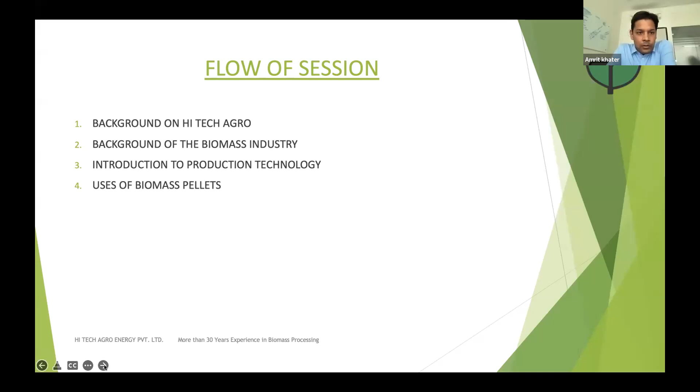Hi Tech Agro happens to be one of the pioneers in the biomass field in India. The first steps were taken in the early 1980s, 1982, by my father, and I happen to be the second generation, as Dr. Dhamija mentioned. The first few machineries were imported from Switzerland. It was a dying technology all across Europe and North America, becoming obsolete, and we got the machineries to India.

We further developed the pre-processing equipment like dryers and hammer mills to suit local conditions, based on the raw materials, because primarily across the world, when you talk about biomass pellets, 99% of it refers only to wood-based material. When we look at India, a country producing a lot of different agri residues, the primary machineries which were used failed to perform because they were not really meant for different biomass residues, and were only meant for sawdust.

That is how we started, and by about 1985 we had streamlined the production of briquettes. We had developed our in-house dryer systems and hammer mill systems, and the briquetting machines were further upgraded to suit the Indian biomass residues available locally.

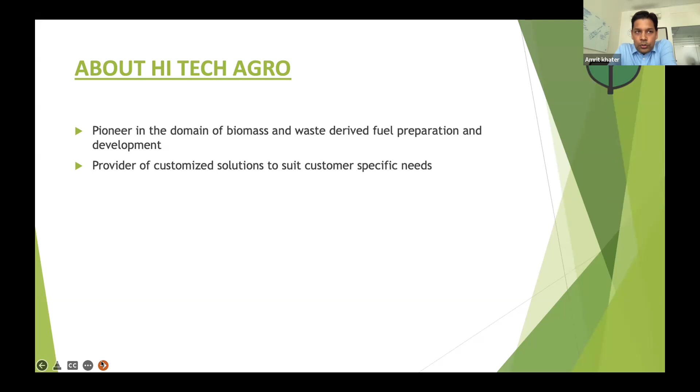From 1997 onwards, we started supplying these machineries across different parts of India, starting with Punjab, Rajasthan, Gujarat, then South India. All these were customized because there were specific client needs, and there were no standardized norms of the industry at that time.

Some people wanted smaller-scale machineries, while others had larger residue generation themselves and were looking at larger capacity plants with more integrated solutions. That is how we started the journey of providing integrated turnkey solutions.

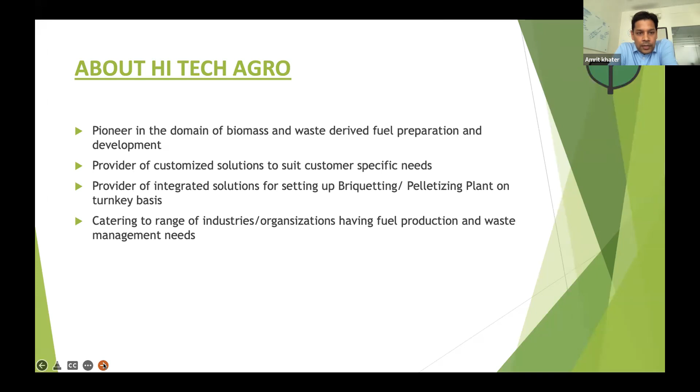Not only individual entrepreneurs, but of late we have also had FPOs, the farmer producer organizations themselves, who have come up wanting to utilize their own residues, be it cotton stalks, pine needles in Uttarakhand, or bamboo plantations in the Northeast. We have been providing solutions to all these sectors.

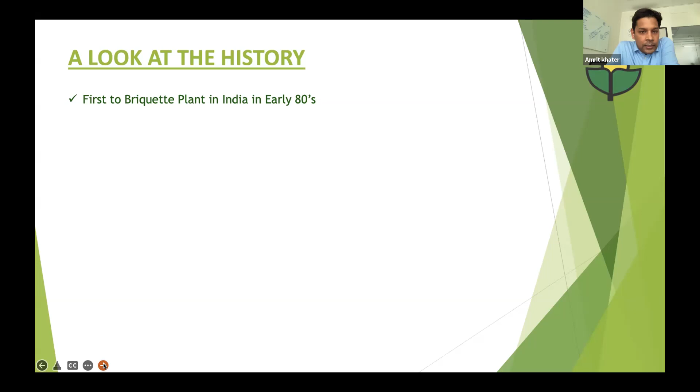Just a short look at the history: in the early 1980s, the first plants were set up. We developed the flash dryers to suit the first materials used, sawdust. Then we also developed portable briquetting plants because there was interest from a couple of agricultural universities in South India, who felt that instead of bringing the biomass from the fields, we should take the plant itself to the farms, so we could make the briquettes or pellets there and just transport the end fuel to the consumer.

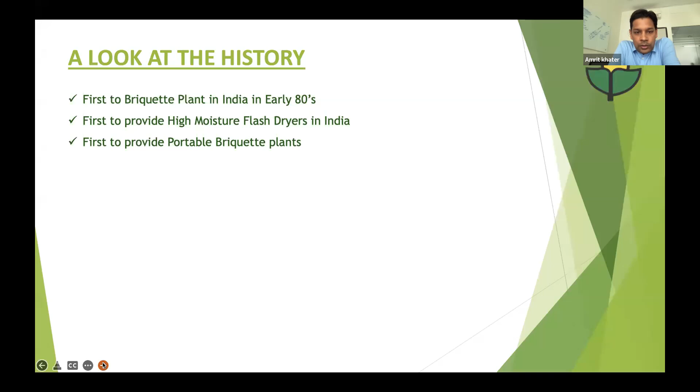That was one of the very important developments that we had. Of late, with the air pollution importance as Dr. Dhamija was mentioning, with the changing norms, there was a need which arose for having air pollution control equipment, which have now become an integral part of the systems and solutions. But till a couple of years back, this was not something which was actually very relevant or present in the briquetting and biomass industry in general. So this was something that we introduced.

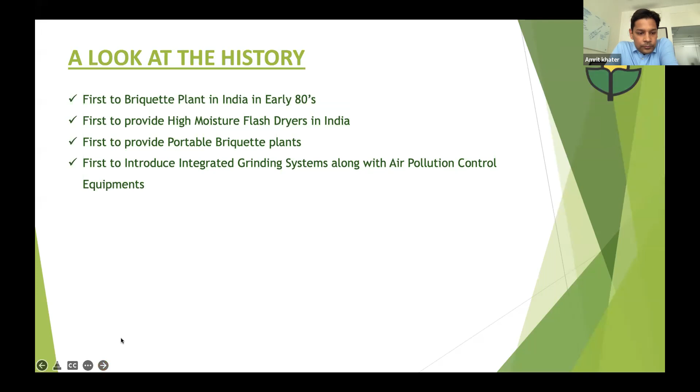Again, for pelletizing, apart from the normal pelletizing for fuel, pelletizing of a lot of materials is done for different food products also. So we introduced the temperature controlled pelletizing for food grade items.

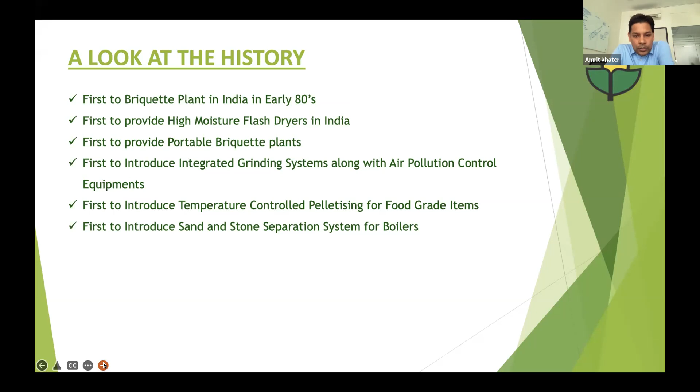The biomass usage increased over the years, and people started using biomass directly in their boilers. A very strong need came up for systems to remove the impurities from biomass, because biomass as it comes from the fields will have impurities like sand and stones, and the boilers which are to run continuously around the clock were facing high downtimes. This was something that we introduced to suit their requirements. Then RDF pelletizing was again something that we did.

Paddy straw stubble burning was a major concern in Punjab, and the first couple of projects for paddy straw pelleting and briquetting in Punjab were done by us.

100% pine needle pelletizing. Pine needle again happens to be a major cause of forest fires in the hills, and this project was done with an FPO, the first of its kind all across the world, wherein we are actually pelletizing on the hills itself, 100% pine needles without any use of binders, and the fuel is actually sent downhill for consumption.

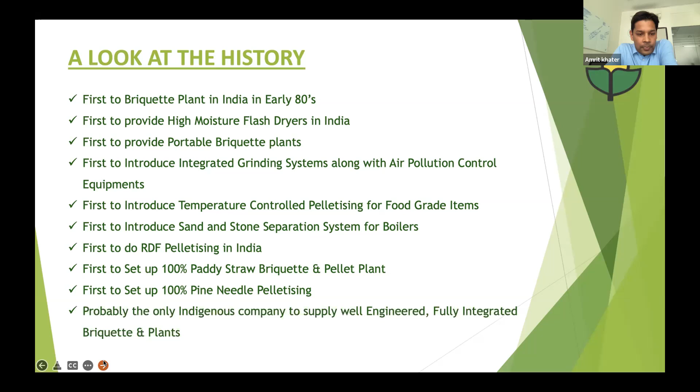So we've been into the business for more than 35 years now, supplied more than 500 plants worldwide, more than 100 dryers working, and perhaps one of the largest suppliers of integrated solutions all across the biomass domain.

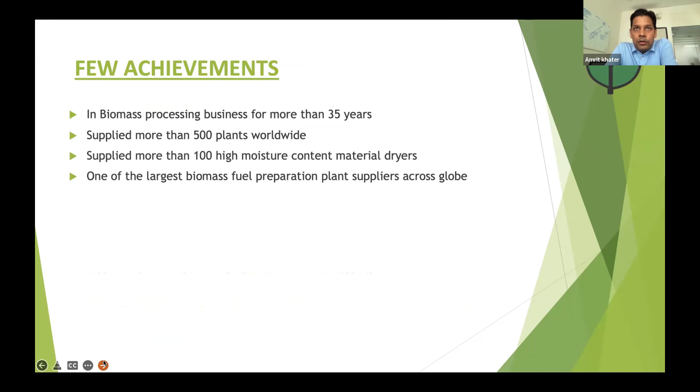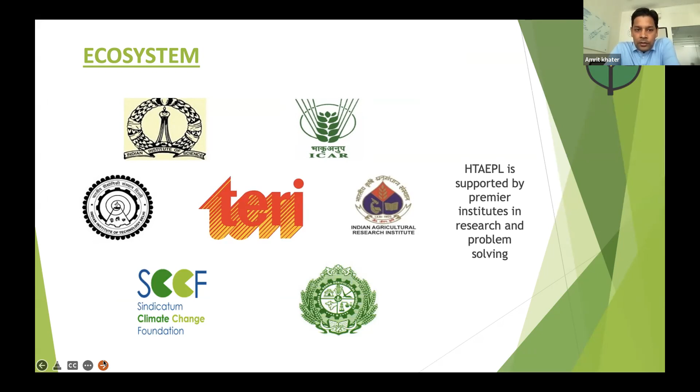Why we've been able to do all this is because we have a strong ecosystem, and we are supported by premier research institutes. We've done projects and jointly developed systems with IISc Bangalore, ICAR Bhopal, Indian Agricultural Research Institute, TERI, and Acharya N.G. Ranga University in Andhra. We have been continuously working with them on a regular basis for development, for identifying problems that we jointly foresee could come up in the future, and then arriving at suitable solutions.

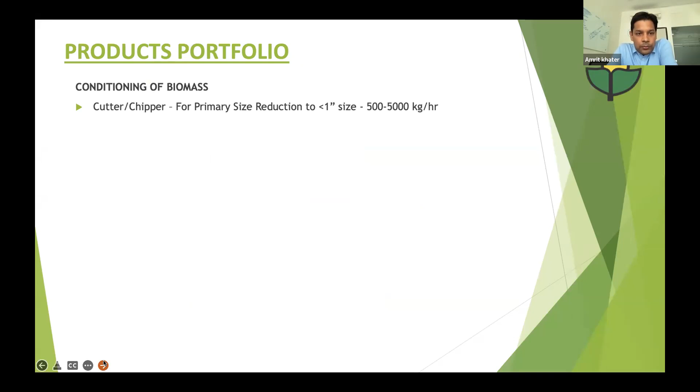In terms of products, what we do is the conditioning of biomass. For any biomass to be processed into pellets, some amount of conditioning or pre-processing is required. Chipping or size reduction, primary size reduction, could be one of them. The second is fine sizing, because to convert into pellets, the material needs to be in a small size, which is powdery or granular.

Then there are dryers for moisture reduction, because not all farm residues come in forms which can be directly utilized. Most materials have moisture levels which are way beyond what the pelleting, hammer mills, or size reduction equipment can handle. So dryers are used for those.

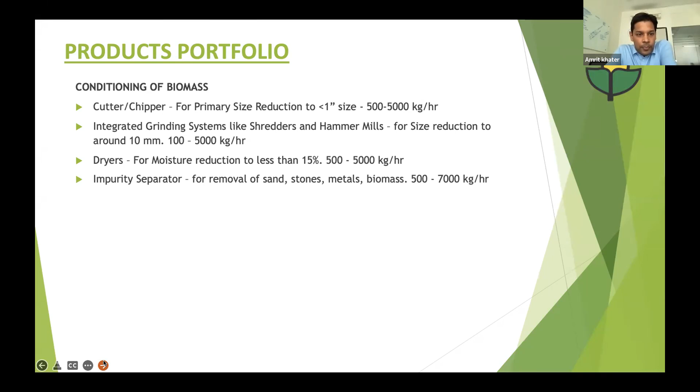Impurity separator for the removal of sand, stone, and metals from the biomass is a very important equipment. Then the densification, there are briquetting machines, pelleting machines, material handling, and all related equipment like pneumatic handling systems, belt and screw conveyors, bucket elevators. All these things are the entire range of products that we deal with, and what is required for setting up a pellet production line.

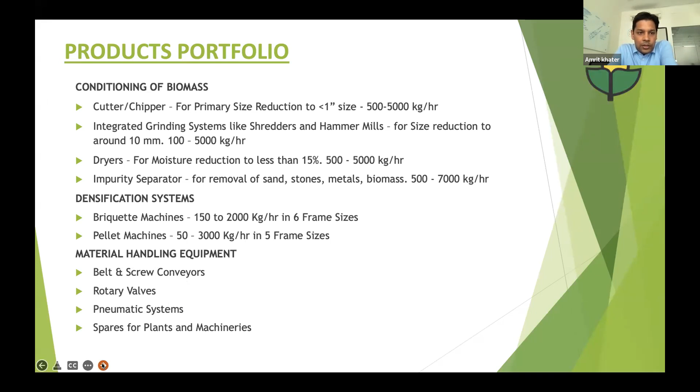Moving on to the next decade, the briquetting industry pretty much started gaining momentum. A few larger capacity machines were introduced, along with hammer mills and dryers. For pellets, the industry had just started, beginning primarily with municipal waste and very few biomass projects. Capacities were still generally small, not more than 20-30 tons per day. Liquid fuel replacement had started, and briquettes started moving pretty well.

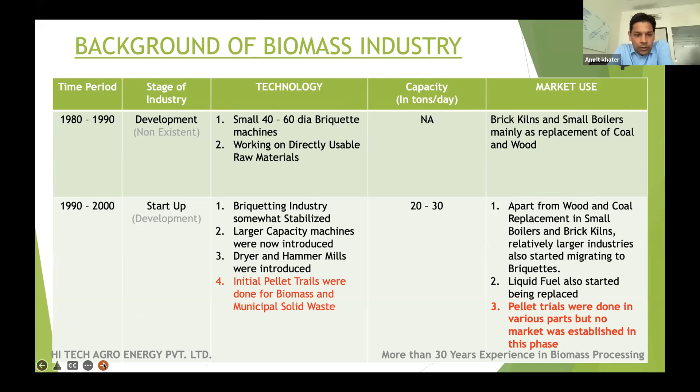Pellet trials were done, but there was no concrete market linkage that could be established in this phase. As a result, the industry did not really pick up very well during that time.

From the year 2000 to about 2016, the briquetting industry pretty much standardized. Many projects came up all across the country, some being automated integrated plants working at about 30 to 100 tons per day capacity, but most of them small manual setups. The range of agricultural waste utilized also increased.

Apart from directly usable materials like sawdust and groundnut shell, people started also going into other materials like cotton stalks and soybean husk, which were not as easy to process, but with development of pre-processing technologies, these started taking place. Pellets also gained momentum, and a number of sawdust plants based on foreign technologies were set up.

The primary market that sawdust pellets addressed was appliances like pellet burners and pellet stoves in small industry, which were directly replacing liquid fossil fuel and provided significant cost saving. As a result, this really gained momentum.

Also, the pharma and FMCG companies, mostly all MNCs, started exploring the use of biomass, and gradually shifted by the end of this phase to biomass as and where they found assured market linkages for the briquette and pellet supply.

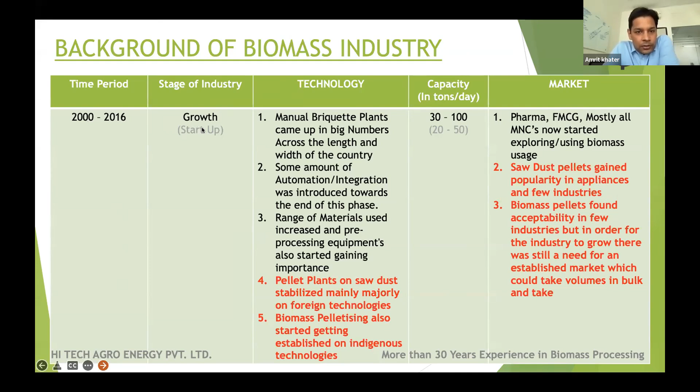So post this, currently the stage in which we are in, briquetting is fairly streamlined. Integrated automated setups are coming up all across the country. Pre-processing in terms of cleaning, sizing, and drying across all materials has been pretty much streamlined, and has become a routine affair now.

The pharma and FMCG, mostly all MNCs, still continue to use biomass briquettes and pellets. In fact, whatever few companies which are not there till now on biomass are also trying to get themselves on board, as long as they can find the fuel linkages.

Biomass pellet plants based on indigenous technologies which were developed now started getting established in this phase, and a good number of plants came up. With government policies and increasing awareness, organizations like NTPC and state-owned power plants, Reliance, Godrej, and many corporates coming into the biomass sector have created huge traction, and many more plants are now coming up in the biomass sector as well, and sawdust appliances obviously continue.

So probably a couple of years down the line, what we are looking at is a very established and standardized market with long-term offtake contracts, and also contracts for back-end integration in order to source the raw material and work sustainably in the sector.

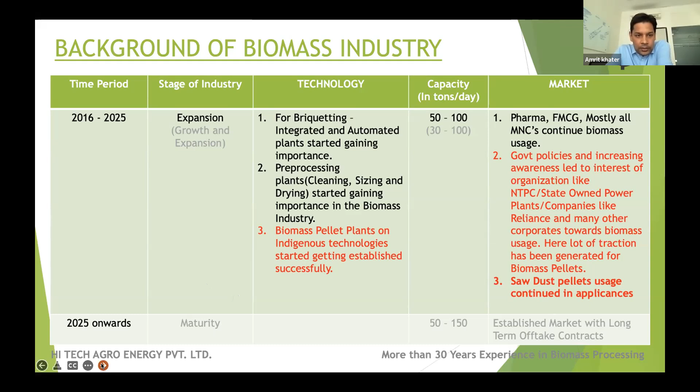So what all can be used for pellet production? Almost any biomass, any agri residue that you can think of, can be used.

Starting right from sawdust and sanding dust to wood chips and shavings, these being the woody biomasses. Moving on to pine needles, juliflora, wild grasses, lantana, shrubs, bamboo chips, bagasse, sugarcane trash, press mud, coir dust.

All husks primarily, rice husk, coffee, sunflower, mustard, any husk of any agricultural commodity. Shells like groundnut, castor, almond, all stalks and straws like paddy straw, cotton stalks, mustard stalks, maize cobs.

So these are all the materials that can be and are being used for the process of pellet production.

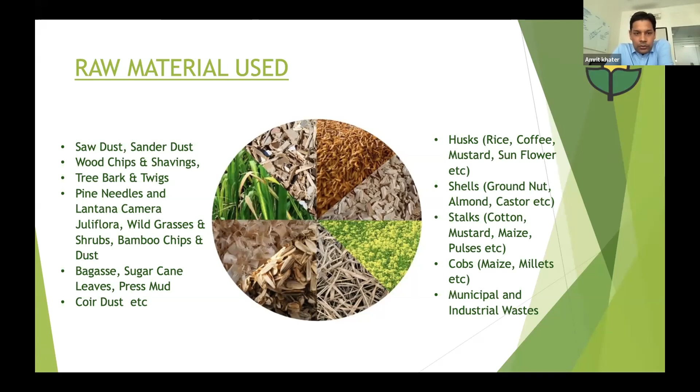So when we talk about biomass pelletizing, the biomass, basically crop residues, leaving aside wood waste, we are looking at primarily three types of waste. The first is waste which comes from agri industries like groundnut shell, rice husk, bagasse. These materials have had fairly well standardized usage, going on for quite a number of years now.

The second is material which comes from the farms but still passes through some process like threshers, like soya, mustard, tur dal. So the waste coming from these materials is something which is also being processed in the country as of now.

The third, and the most in terms of quantum, is the most widely unutilized waste and the major cause of farm fires and pollution arising due to it - materials like cotton stalk, cane trash, paddy straw, which are basically left in the field, which did not have a great market till now and were not being utilized.

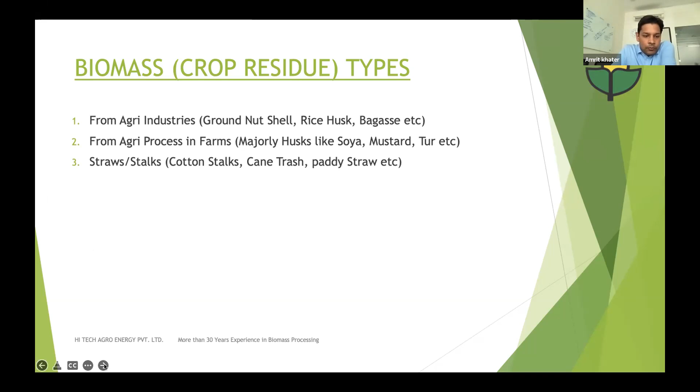Any production plant to be set up requires biomass collection as the step before. So just a brief on biomass collection: the first two categories are waste which are available in readily handleable form, which can be just loaded onto a trolley or truck and got to the plant for processing. Straws and stalks will be forming the major chunk of material going into pelletizing in the years to come, so the collection system for that needs to be established.

These are mostly collected through baling, and a few materials like cotton stalks are done through online chipping in the farms. In case of baling, we get square bales, small square bales weighing about 15-20 kgs. For larger farms and completely mechanized systems, there are round bales weighing about 600-700-800 kgs, which can be collected.

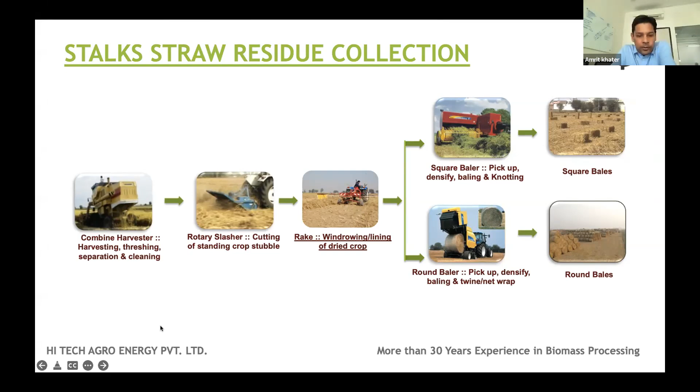Coming to the processing technology for production: once we have the material, it could be bales or chipped stalks, chipped cotton stalks, or any other chipped biomass. We look at primary sizing, which basically converts the material into a form wherein it can be handled in a mechanized way, with no need for any manual intervention subsequent to that.

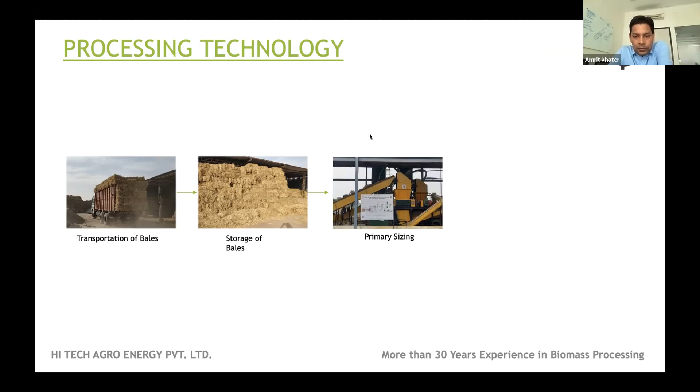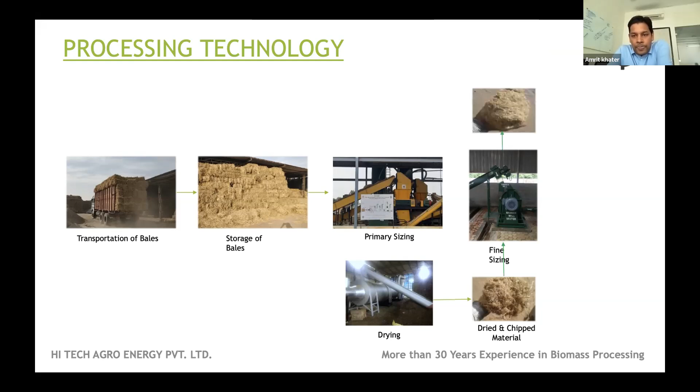From here, if the moisture levels are high, it goes through a drying process. Then further to fine sizing, to convert it from say a 1 to 2 inch size to almost less than 5 millimeter, 5-6 millimeter size, to ensure it is in a pelletable form. This then moves further to the pelleting, and the pellets are made.

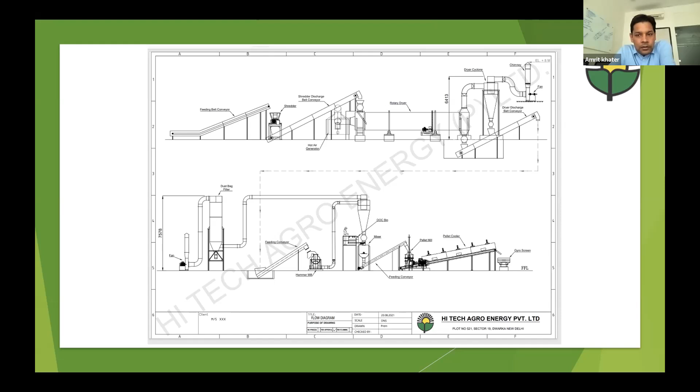A short video on the production process is now being played.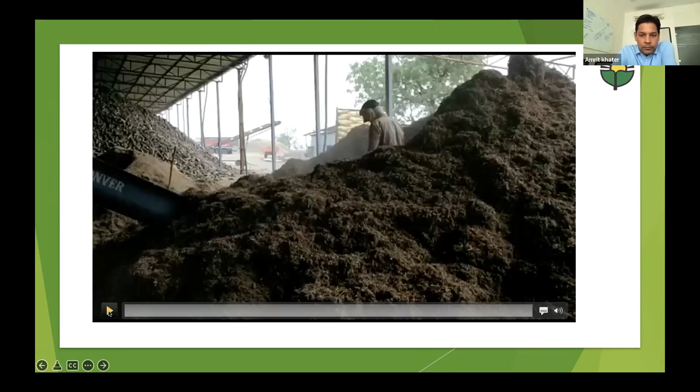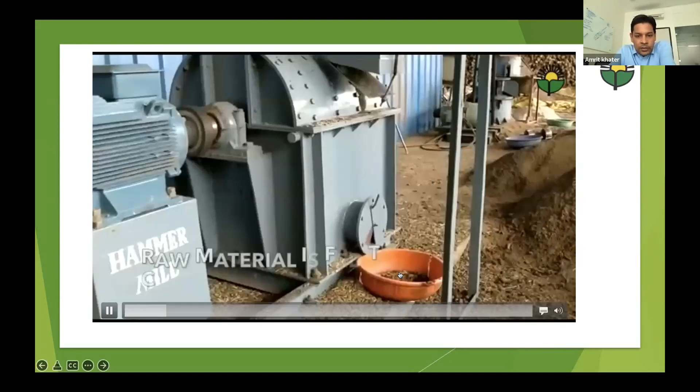The separation of stones, sand, and any other metallic impurities, if they are part of the biomass, happens at the first stage.

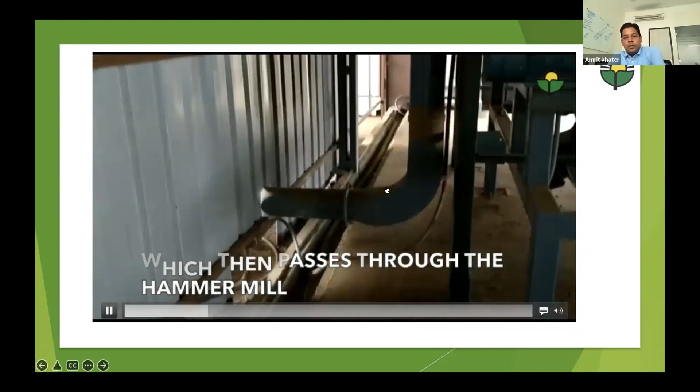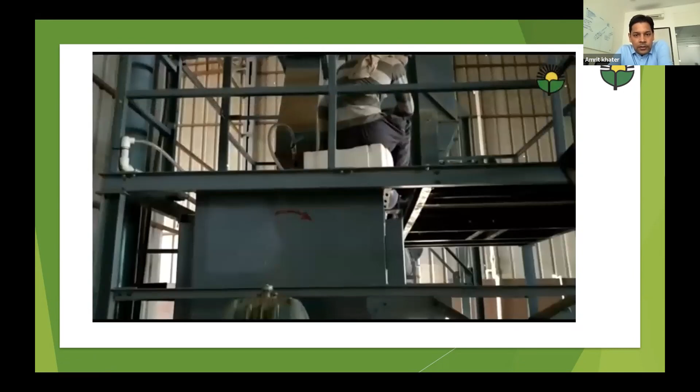The crushed material then goes into the mixer, where if required, the addition of water happens and moisture uniformity is created, and it acts as a buffer. The dust-laden air goes into the bag filter.

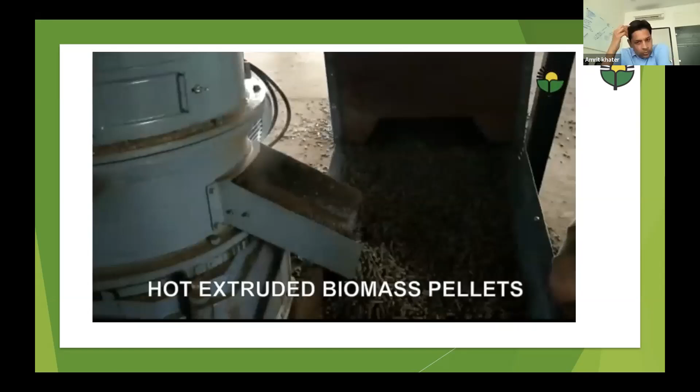The conditioned material from the mixer is fed to the pellet press. The pellets formed are quite hot, at about 80-85 degrees centigrade, and are cooled and dried and then sent for further storage.

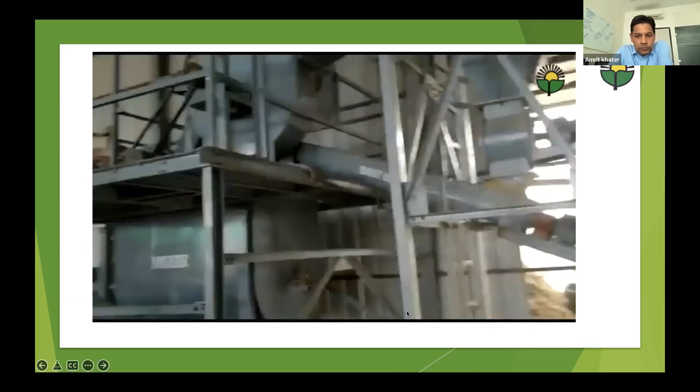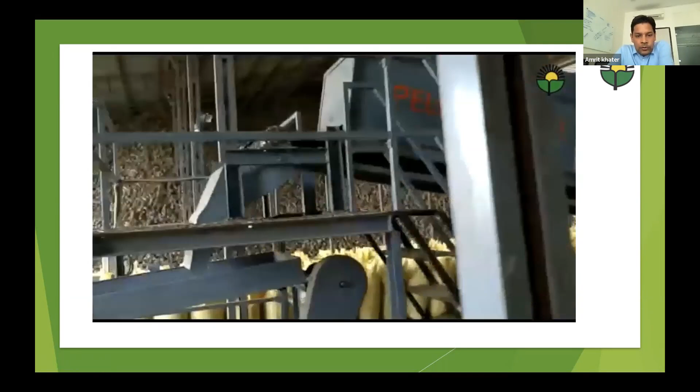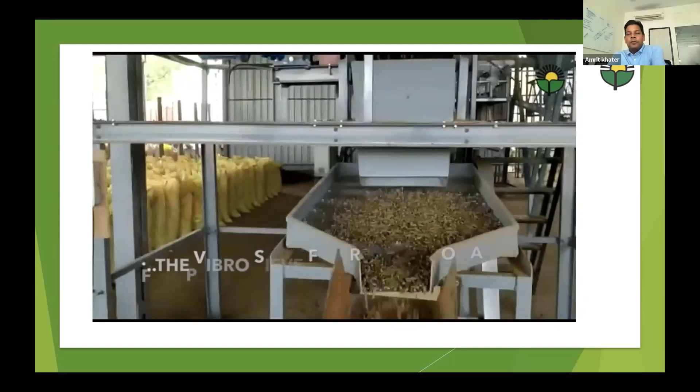In case of material going to smaller industries or appliances, the pellets could be packed in bags. In case of bulk consumers, like power plants, it needs to be sent in loose open condition, just open pellets loaded onto the truck.

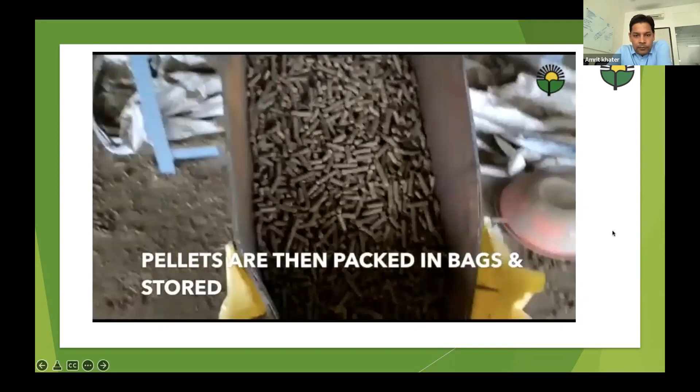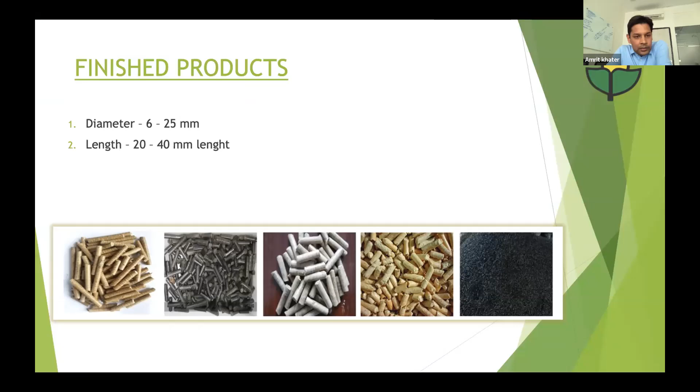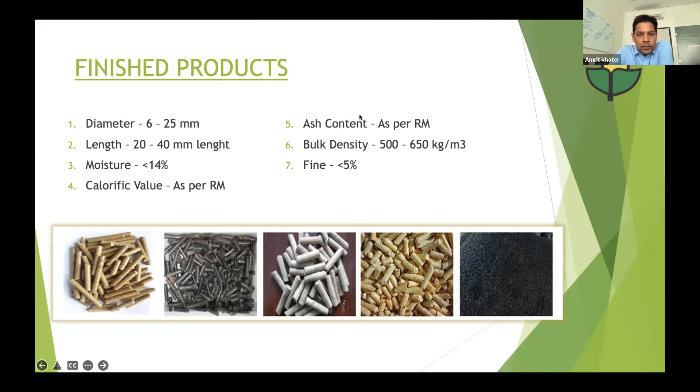So the finished product pellets, just a few pictures of different pellets from different materials. The diameter typically ranges between 6 to 25 millimeter, length 20 to 40 mm, moisture levels less than 14%, calorific values as per the raw material mostly in the range of about 3,500 to 4,000 kilocalories. Ash content, again as per the raw materials, mostly what is preferred is less than 10%. Density ranges from 500 to 650 kg per meter cube, and fine generation of less than 5%. This is what a typical pellet spec would be, made from agri residue.

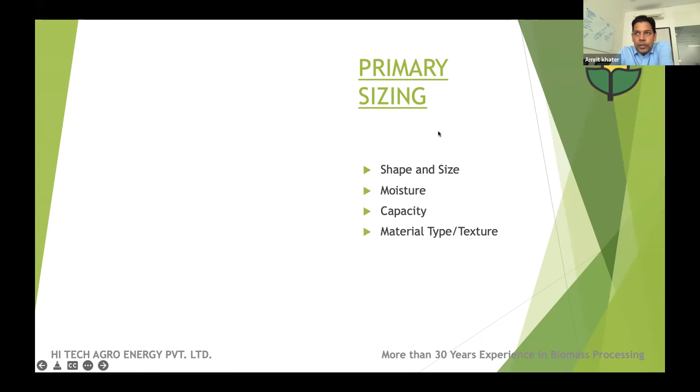So there are multiple ways the processing could be done for production. The first stage, primary sizing: selection of what kind of equipment would depend on the shape and size of the material, the moisture levels, the capacities desired, and the material texture in terms of woody or fibrous, or whatever texture the material has.

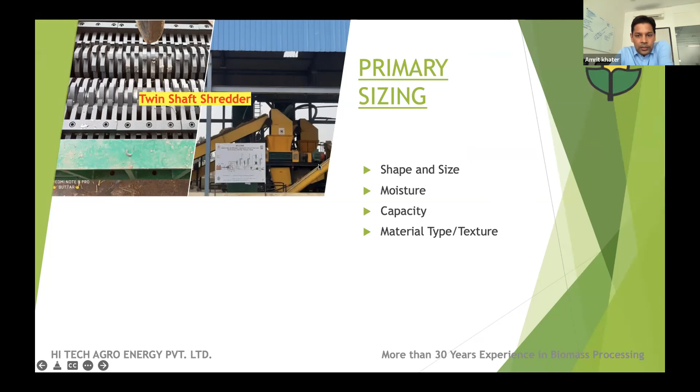Multiple solutions exist. Twin shaft shredders are one of the solutions available for primary sizing, more suited for larger capacity plants and materials with any kind of moisture level. Hammer mill type systems are suited more for smaller capacity and dry materials. Drum chippers are more relevant for woody biomasses with or without moisture levels.

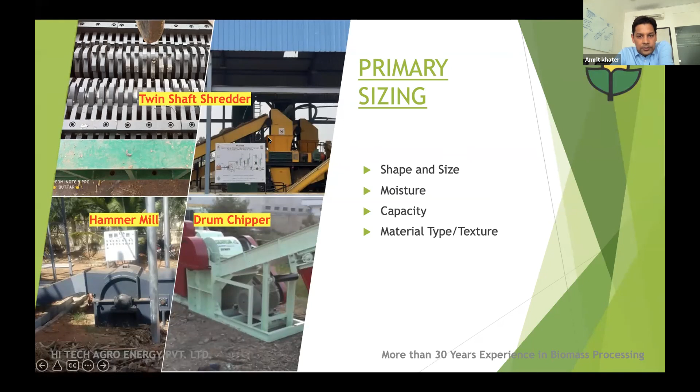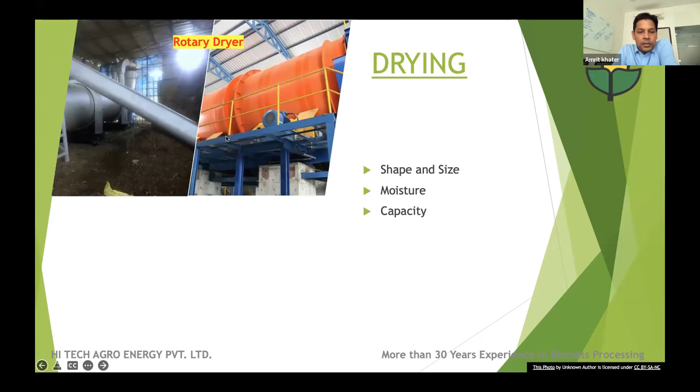For drying, again, the shape, size, moisture, and capacities is what is important. For larger capacity plants, 50 tons, 100 tons per day, normally rotary dryers are used. For low moisture materials and relatively lower capacities, flash dryers are used.

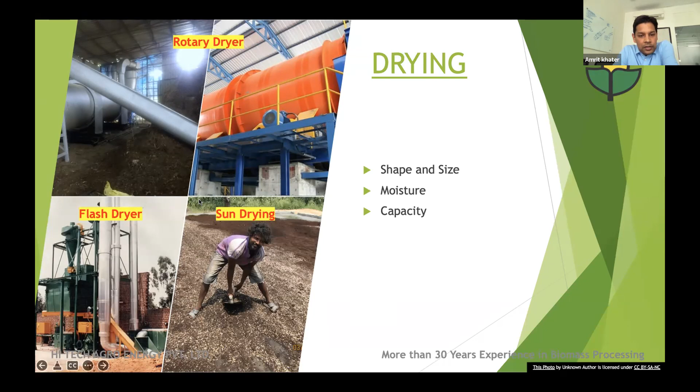Sun drying still happens to be the cheapest form of drying for places like Gujarat, Rajasthan, Haryana, where there is ample sunlight available. So sun drying remains one of the most economical ways for smaller capacity plants.

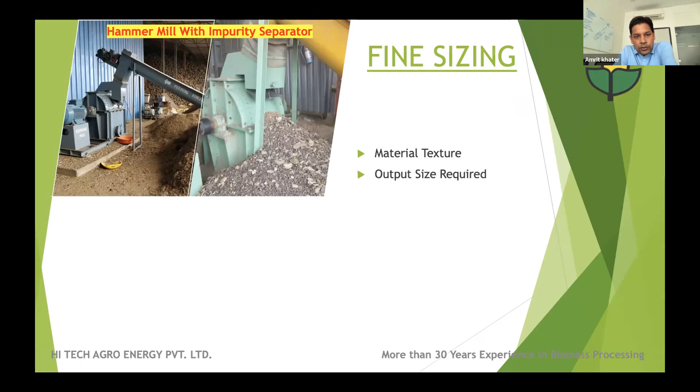For fine sizing, we have different kinds of hammer mills - low speed, high speed, directly coupled, belt driven. Based on what kind of material type we're looking at, whether it's brittle or fibrous, and what capacities we're looking at, the different kind of fine sizing equipment are selected.

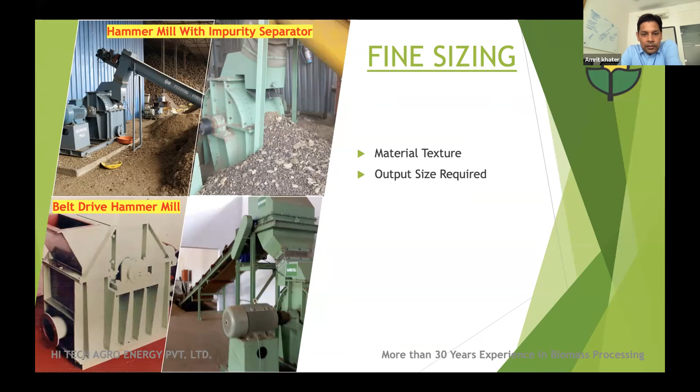Pelletizing wise, it depends on capacity, end market, and material. So apart from the material properties, the end market also plays a very important role in deciding what kind of pellet press should be installed.

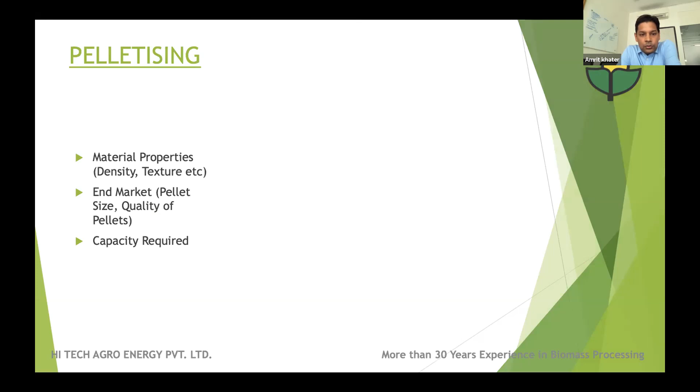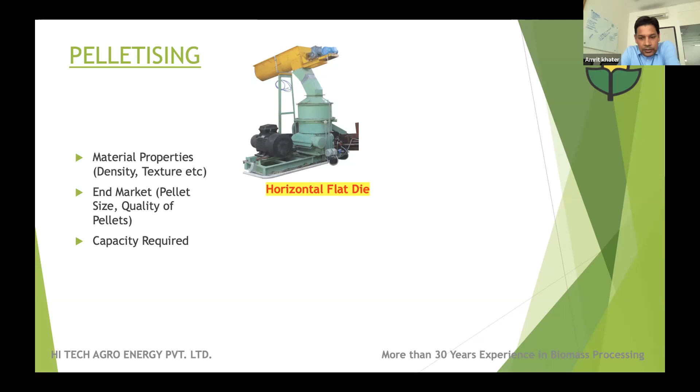If you're looking at something like appliances and probably wanting to produce 6mm pellets from the most woody kind of biomass, then we are probably looking at a more specific ring die kind of machine. If you're looking at any mix of agri residues and large capacity production, then we are looking at horizontal flat die machines. And then there are mechanical briquette presses which are modified to suit pellet making.

For small or medium capacity plants, or for industries already having a setup of briquetting, the mechanical press option happens to be a good option for them to start with and explore the pellet market.

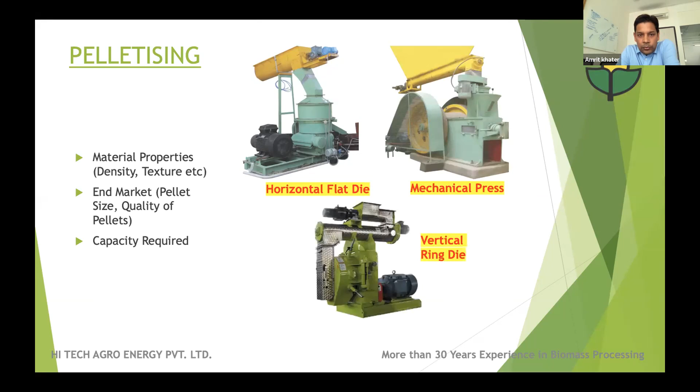Few other items which play an important role in production are the air pollution control equipments. These have become the most critical part now, because the plant setup, when you have multiple pre-processing stages, there is a lot of fine dust and fine biomass particles released into the atmosphere. Looking at current industrial norms, it is not permissible to release those materials into the air directly.

Air pollution control equipment have gained great importance now. Material handling equipment too, because plant capacities have increased, and now instead of just getting readily processable material, mostly the plants get material which has to be pre-processed and conditioned by them to make it suitable to reach the stage of pellet making.

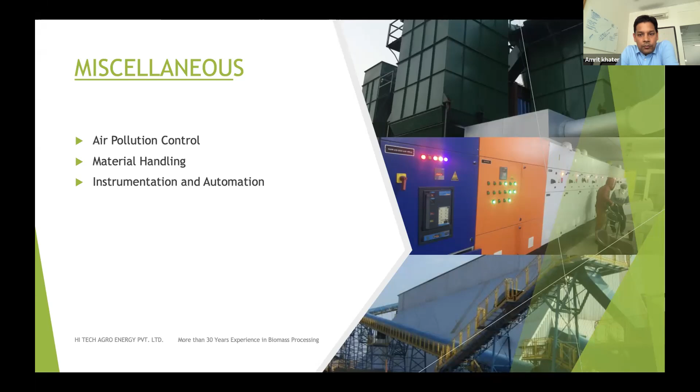With larger capacity plants, manual intervention or any sort of intervention between the different processes turns out unviable and affects the quality, consistency, and efficiencies of the plant. So integrated material handling equipment have become quite relevant now. As capacities have increased, more automated and integrated plants have started coming up, so electrical automation and integration is one of the very important factors to be looked at.

With respect to factors - supposing someone decides to go into biomass pellet production, a few factors that need to be considered before selecting what kind of production technology is the suitability with respect to biomass. Supposing if you're planning a plant on paddy straw as the primary fuel, your technology would be different compared to probably what if you're looking at solid bamboo waste.

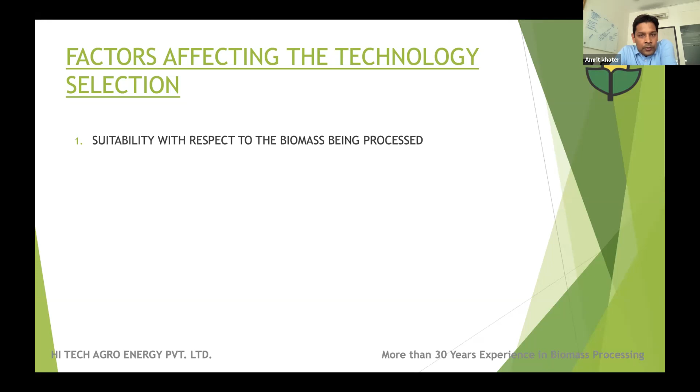The next would be the cost of capital as well as the operating cost. Many times what happens is if the capital cost is lower but the operating cost is so high that it makes the project unviable. So these two things put together is something that should be really considered.

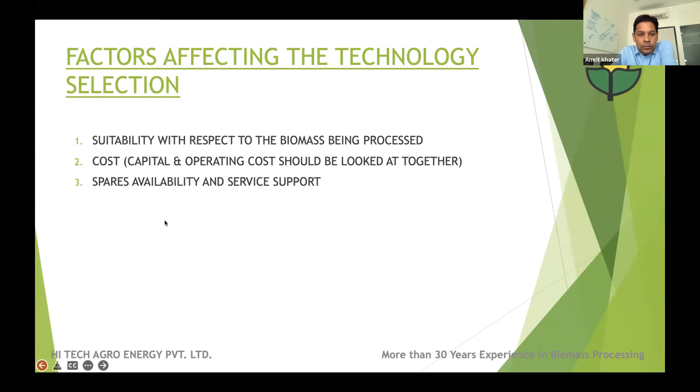And the availability of spares and service support. The biomass industry all across the globe has primarily been working on standardized materials like wood waste. These are materials which come in a specific shape, size, form, and condition, and you can have very large capacity plants with very minimal involvement of manpower.

But in the Indian context, we are basically an agricultural country, and many agri residues are all different shape, form, sizes, and textures, properties. So the local service support plays a very important role here to make the projects a success.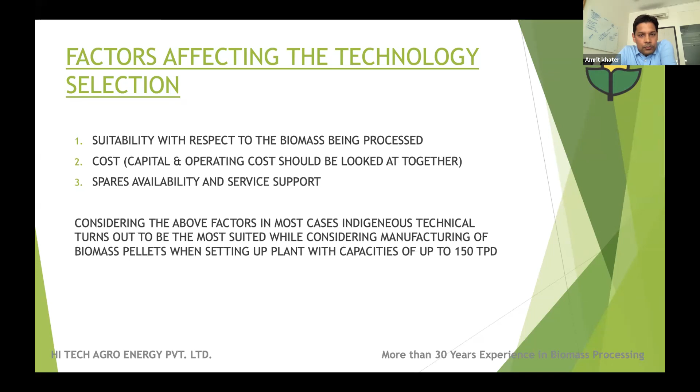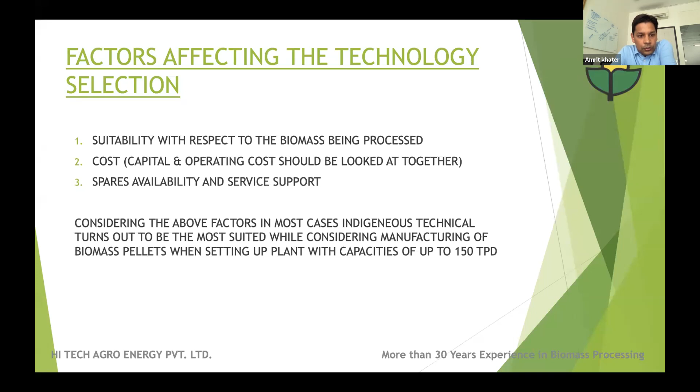Considering all the above factors, mostly what is seen is that the indigenously developed technologies turn out to be the most favorable, because they are more suited to the biomass materials available here. The cost of capital as well as the OPEX cost turns out to be mostly lower than the other European machineries, and also the service and spare support is obviously more available.

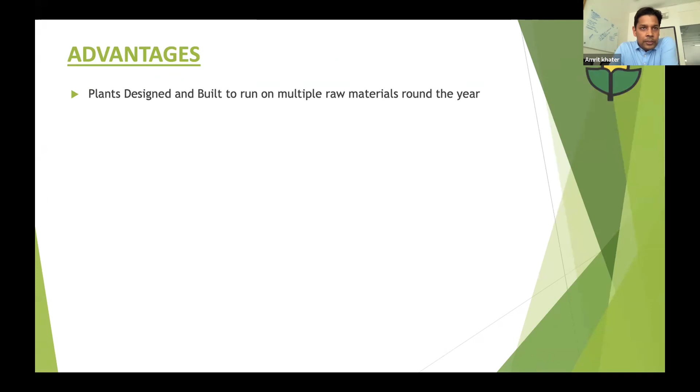From a Hi Tech perspective, the advantages of setting up these kind of projects would be that we basically design projects which can run on multiple raw materials around the year. There is assured productivity, product quality, cost efficiency. The plants are mechanized and automated, so there is limited manpower involvement and can be assured of higher efficiencies of production.

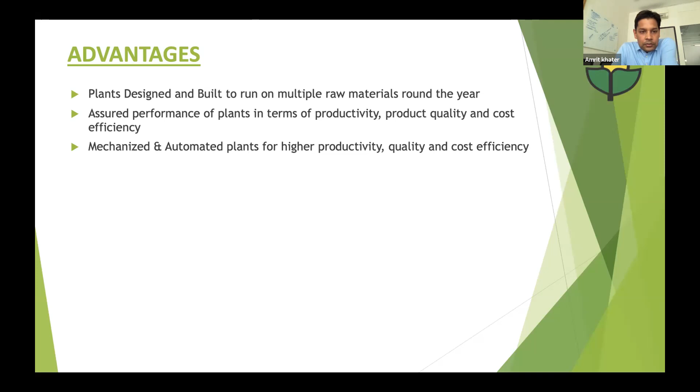So there is a systematic and comprehensive approach to actually handing over the plants to the clients, with proper training being given to the manpower.

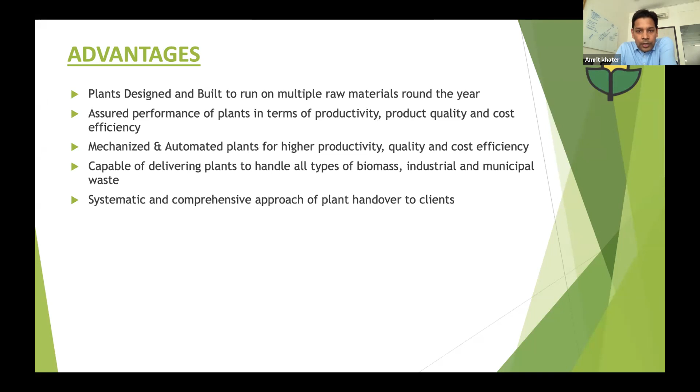Also a very important factor is the operation and maintenance of the plant. Biomass pellet or briquette production is something which, as Skill Council also mentioned, new courses and structures are coming up now to standardize the industry so that we can have trained manpower. As of today, the availability of such manpower is not there, so at our end we are trying to ensure deployment of trained manpower from our side so that production plants do not suffer on that account.

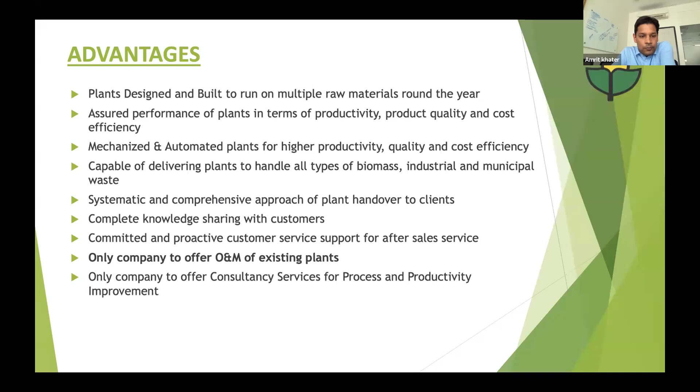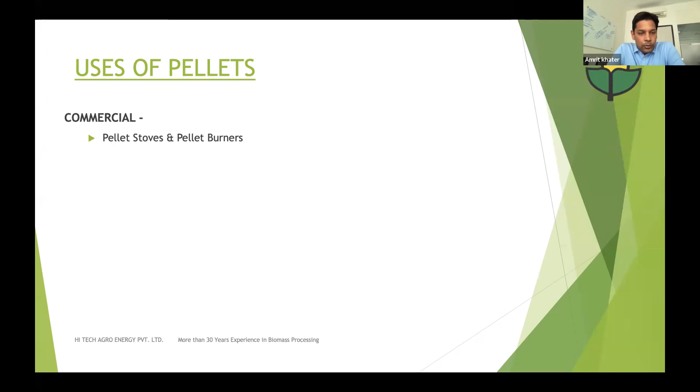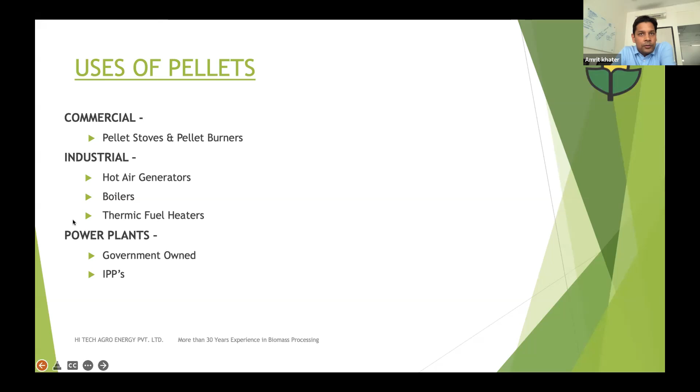Coming to the last section, the uses of pellets. This can broadly be divided into the commercial segment, which is pellet stoves and burners using premium quality, mostly wood pellets. Then the industrial segment, consisting of boilers, thermic fluid heaters, hot air generators, used by pharma, FMCG, textiles and other industries. The latest segment is power plants, government-owned or IPPs, which are turning out to be one of the largest consumers of pellets, far overtaking the first two sectors. For example, the requirement of one power plant would be equivalent to clubbing together maybe 20-30 different industries, or 200-300 small commercial users.

Looking at pellet specs, the commercial segment mainly uses wood waste, premium quality 6 mm pellets. The industrial segment mostly uses agricultural residues and mixed waste, with the most common size being 8 to 10 millimeter diameter pellets. The general market acceptability is for materials with less than 10% ash and about 3,800 kilocalorie minimum.

The market has totally changed with power plants now coming into the picture, as they are open to using any and every kind of agri residue. The size limitations, which were normally for smaller boilers at 8 to 10 millimeter, have now gone up to 25 millimeter, and they accept material up to 25 mm diameter. Most importantly, even low-grade fuels like paddy straw and cane trash can go into the system because there's no real restriction on calorific value. Ash content as high as 20% covers pretty much the entire range of biomass that would be produced, so it covers the entire spectrum of biomass which can be used. With power plants now creating demand, the sector is moving in a completely new direction altogether.

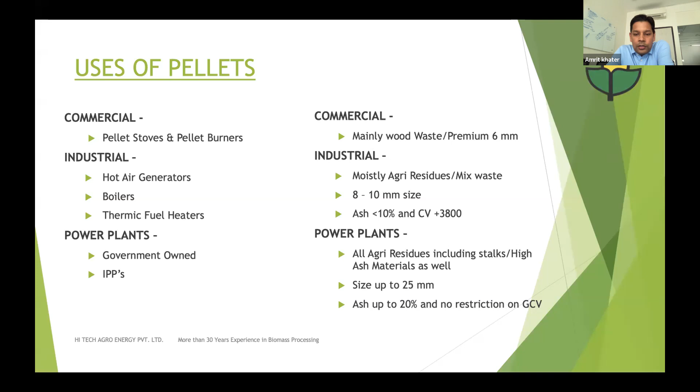So that's it from my side. I think if there are any questions, we can take them. Thank you very much.